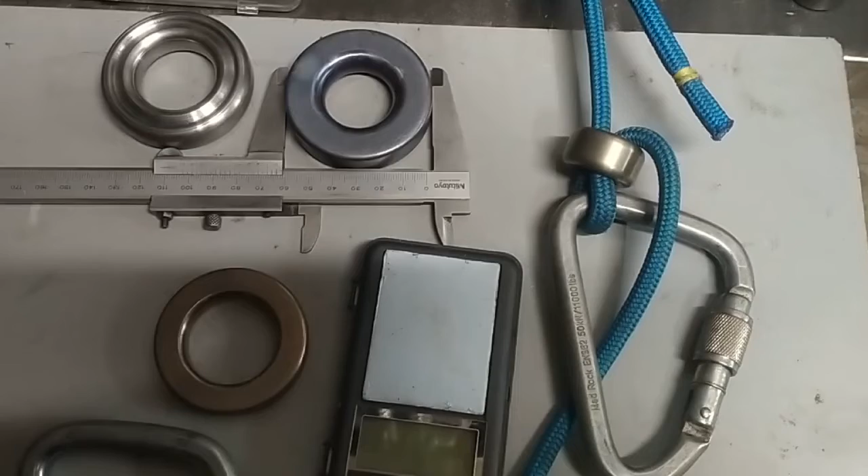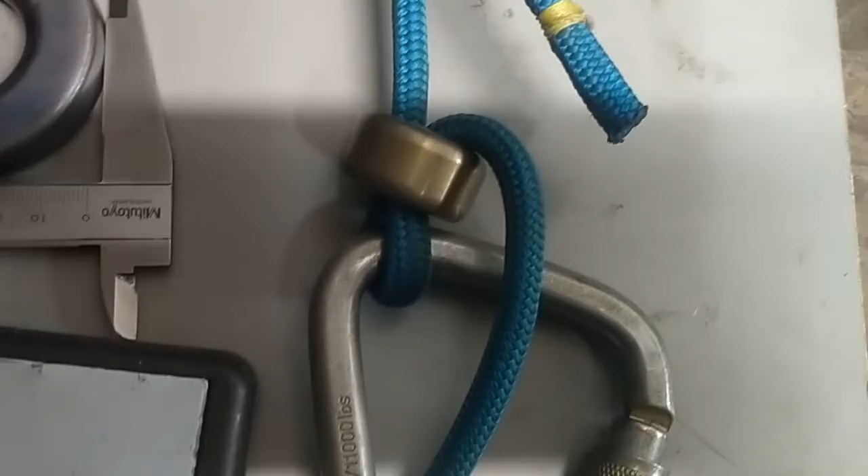My name's Adam. Today I'm going to test a few of these titanium rings. These are rappel rings. There's a belay device, 16mm hole for 8mm rope, designed to be rethreaded. I'm just going to weigh the setup here. So

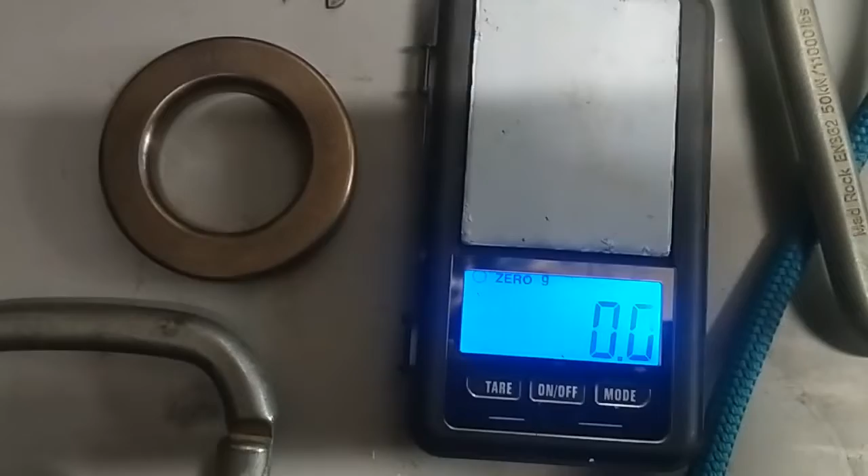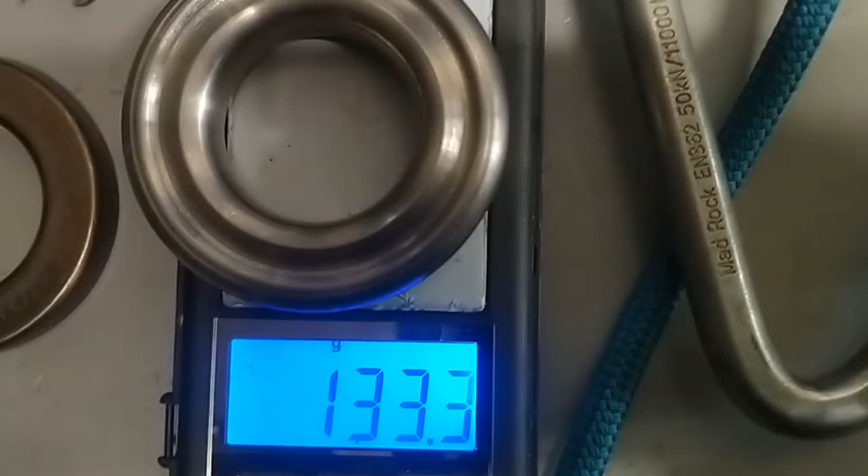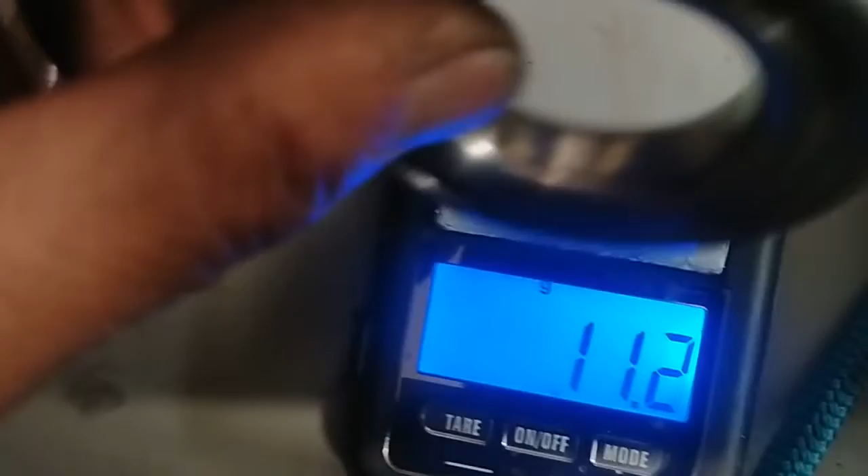normally you'd have two steel carabiners with opposing gates at the top of the top rope for top rope climbing. But the reason you have to oppose the gates is because there are gates. So the way I think about it, if you have a titanium ring, there's no gates and you can't gate load a circle. And I have the ability to make a much larger bend radius for the rope and make a bit of an I-beam cross section with this face groove here.

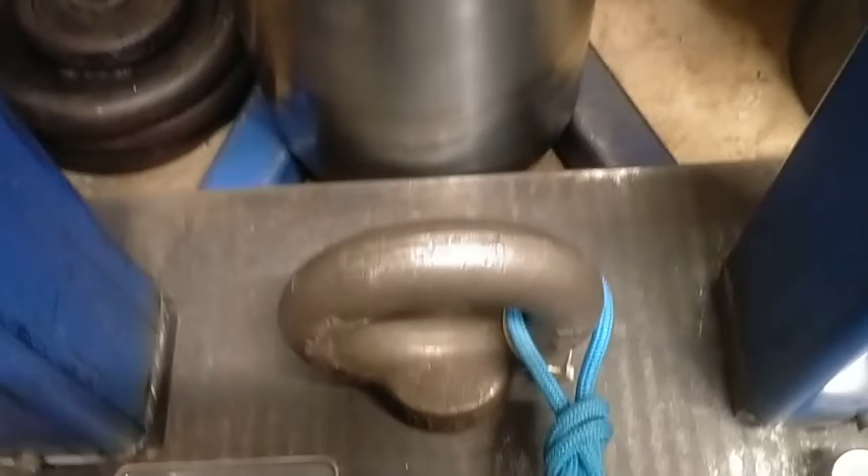As you can see, these titanium rings are a lot lighter than just one steel carabiner, let alone two. So I'll just finish weighing everything here. But before we get to testing, we have to calibrate our test rig. So you see here there's a steel cylinder, and in the next frame I'll get some measurements of that steel cylinder so you can check my calibration weight.

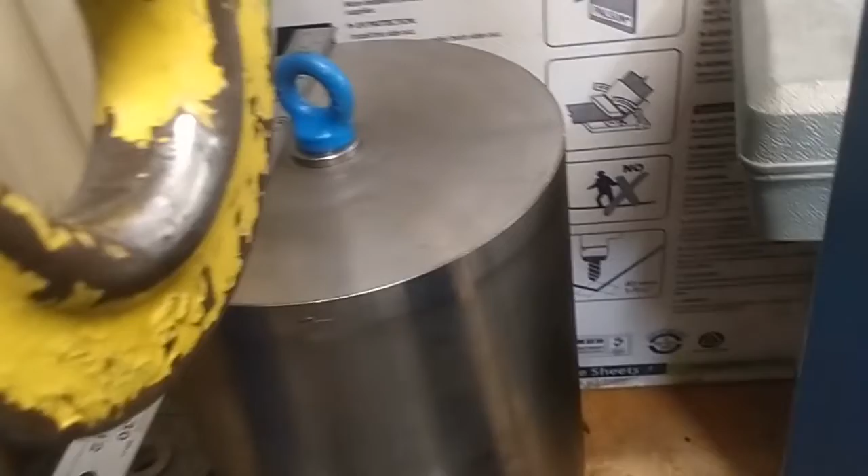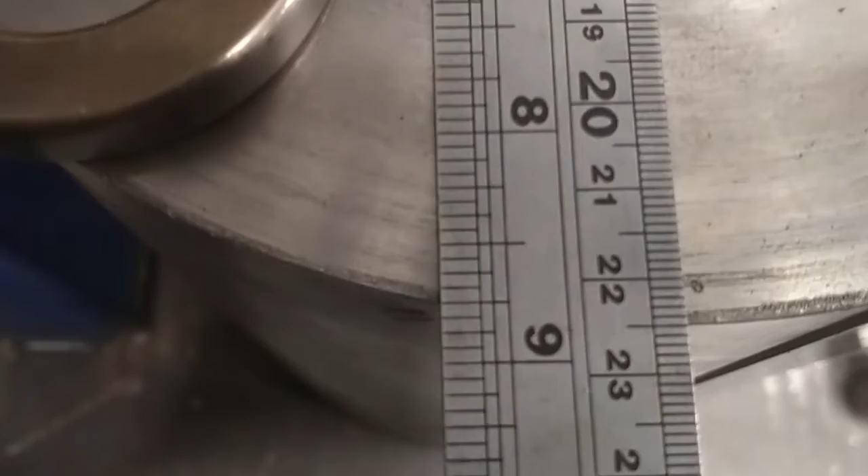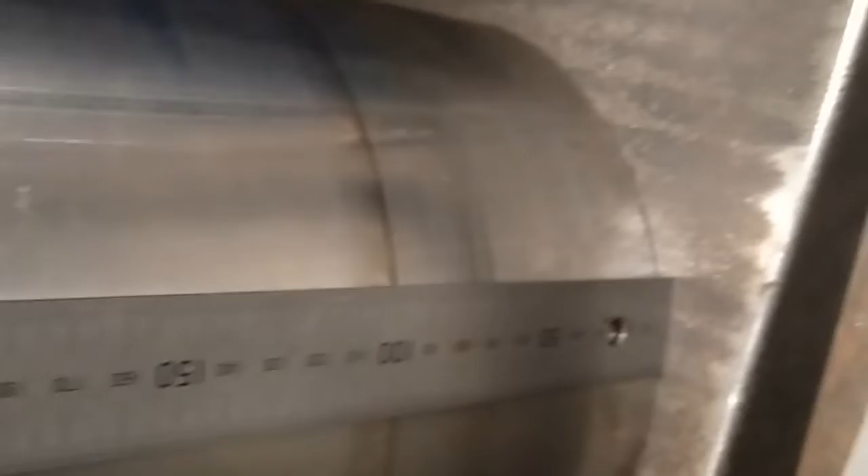Okay, so we've got a magnetic stop here that'll sit on the tangent. And we are at 225mm across, and here we are at 350mm high. Now I'll throw the calculations up in the next frame, and then we'll get to pull testing.

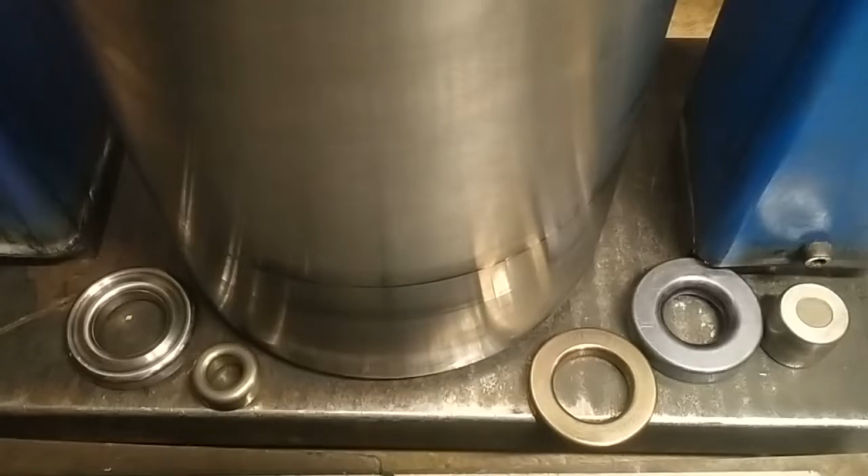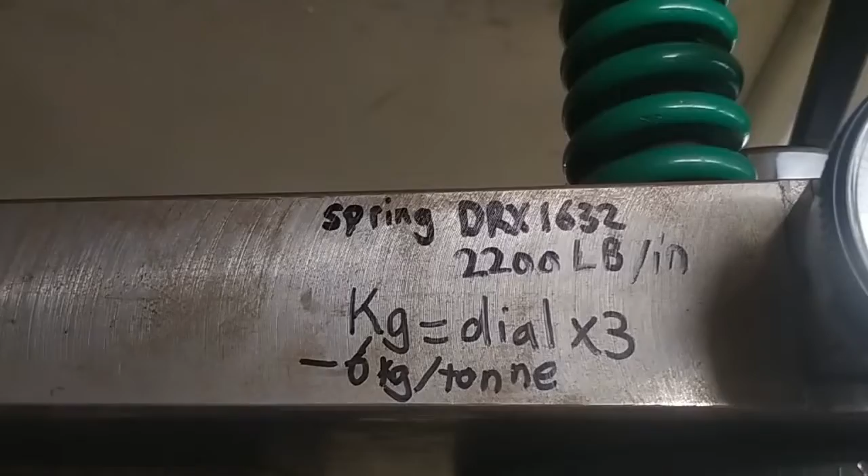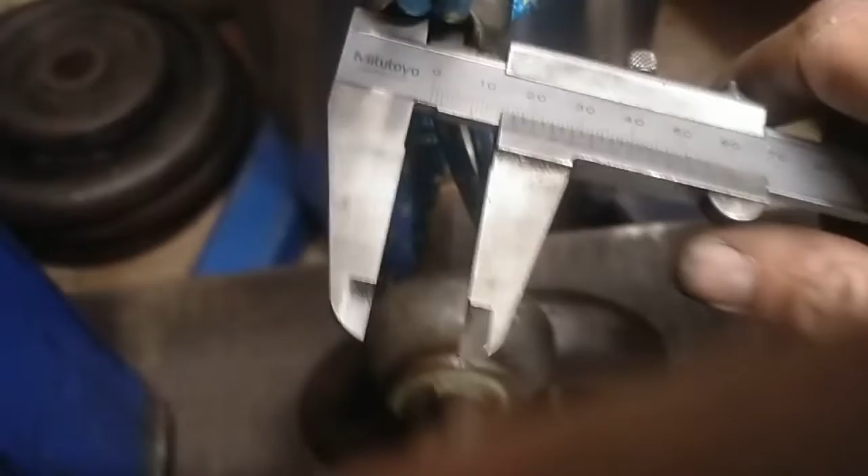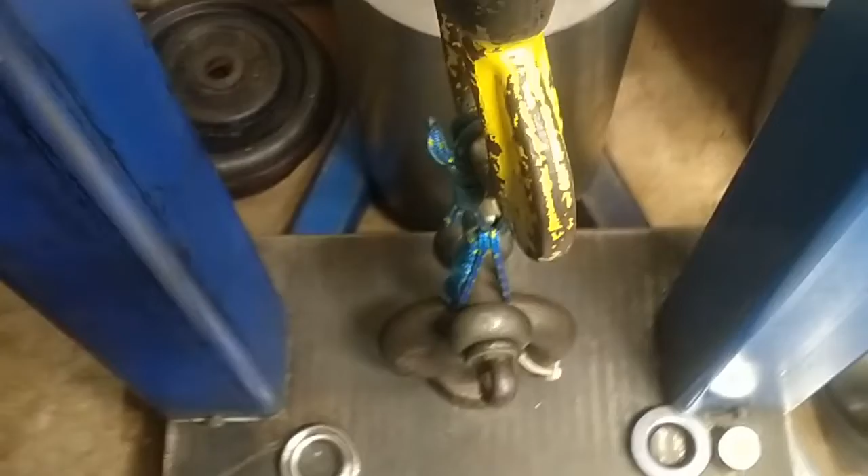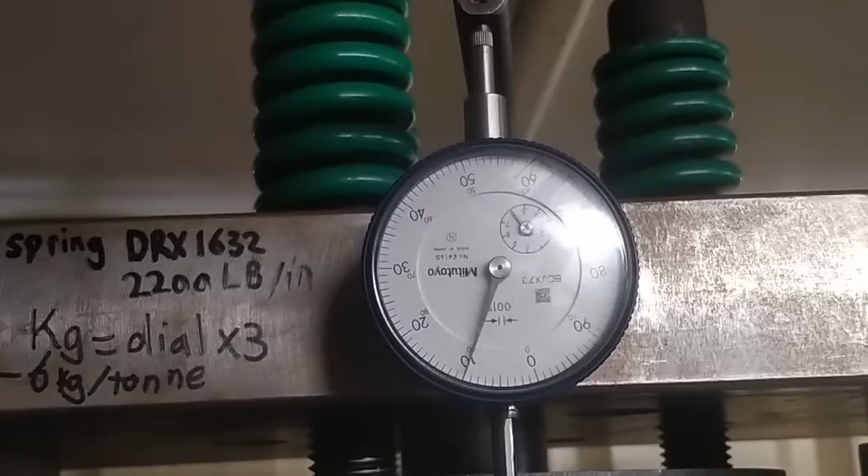So here we have our first victim. She's measuring 16mm, a bit over on the inside, by just under 17 thick, and just under 32 outside. I've got 2 6mm soft shackles. So that is 6, let's do up to 7. Just to pull with both hands here and film.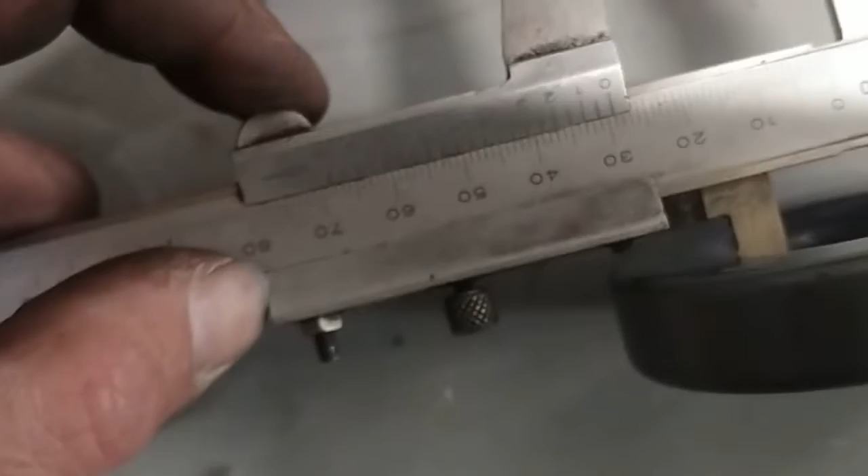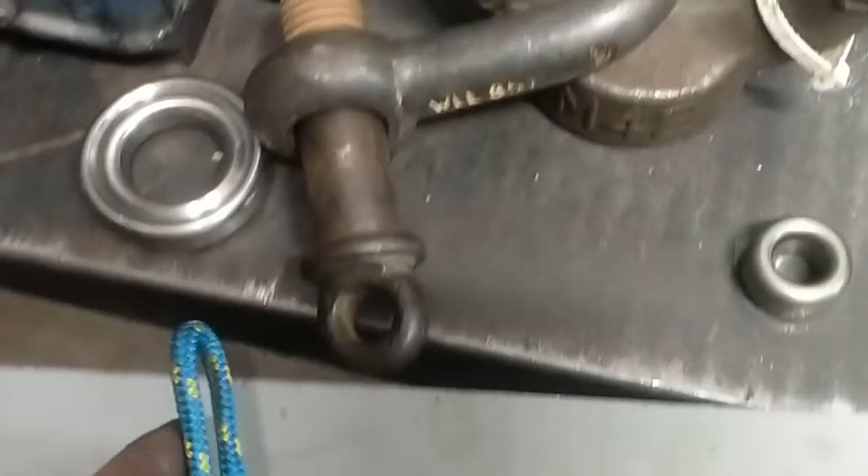So next up, we've got our second victim. 63.5, also known as 2.5 inch. Yeah, let's call that. Scratch that. 29mm. 15mm. So I'll have to have two hands to set this up. Okay, so we have our 63.5 ring in there between two soft shackles again.

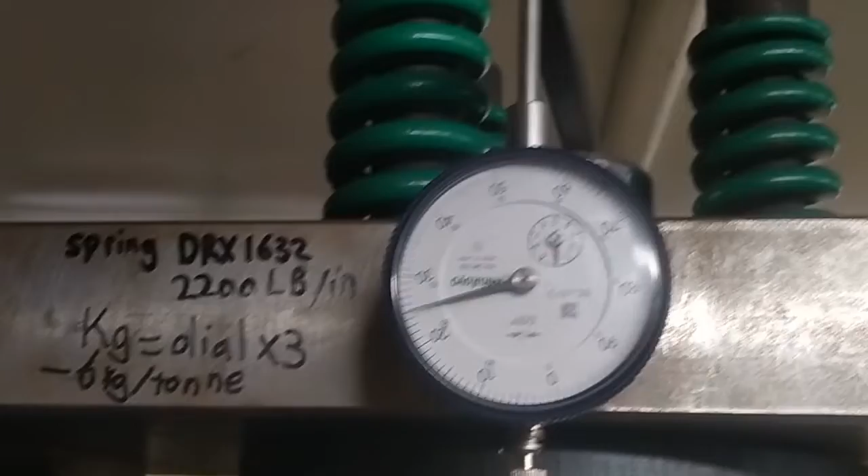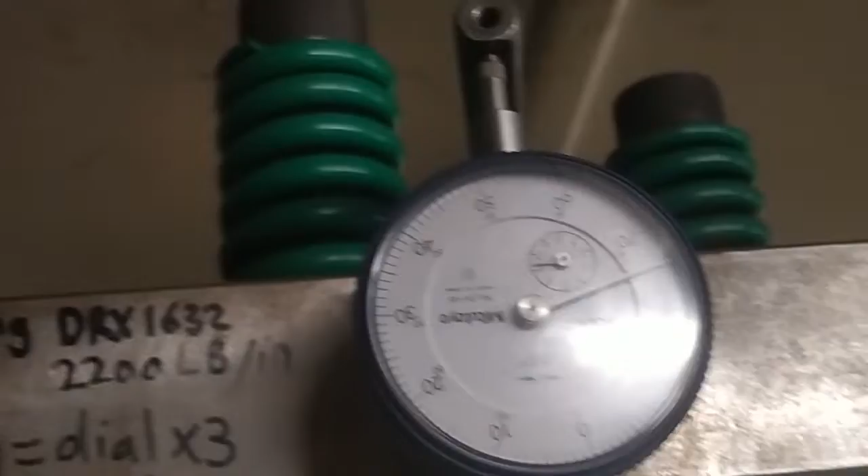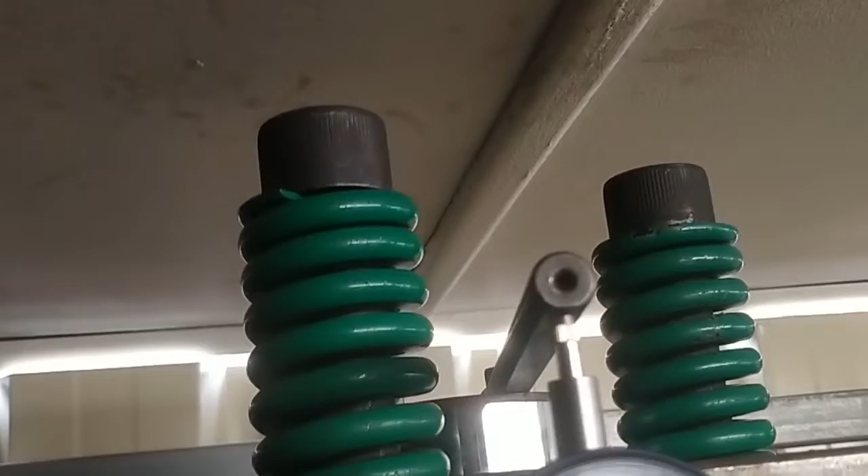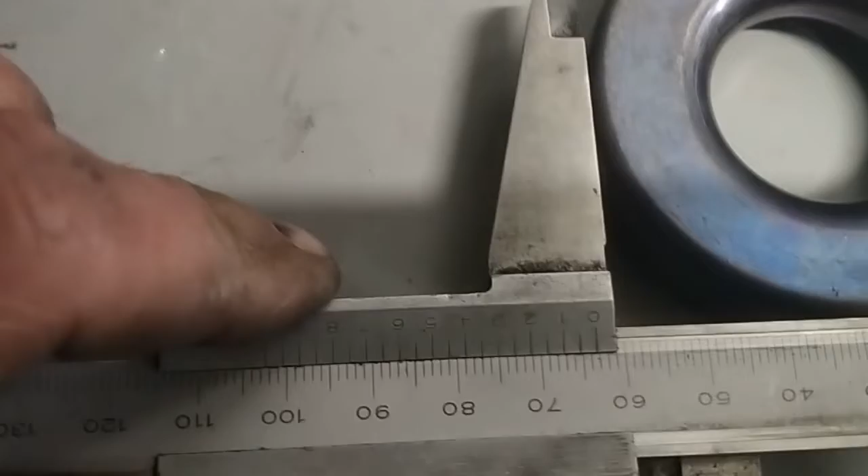Tonne. Okay, in safe excess of 2.4 tonne. Our springs are definitely compressed. Same deal here, we'll measure for permanent deformation. This is raw stock on the outside, so there may be a tiny bit of variation, but it's pretty good. I'm going to call that circular.

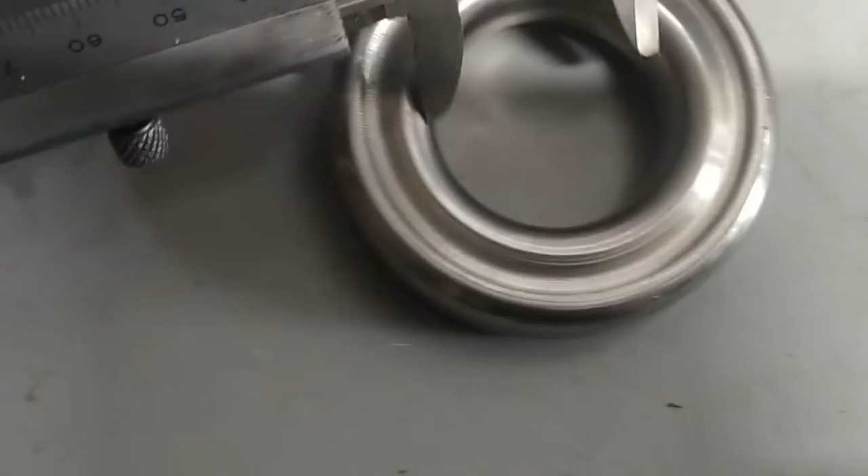So now we'll set up for our next victim, which is 32.5 on the inside. Let's go for outside next. It is 63.7. No, let's make that. Oversized ground material, fancy that. And 15, slightly shy of 15 as I recall. Yes. Okay. It'll take 2 hands to set up this one again, so I'll see you in the next frame. Same deal.

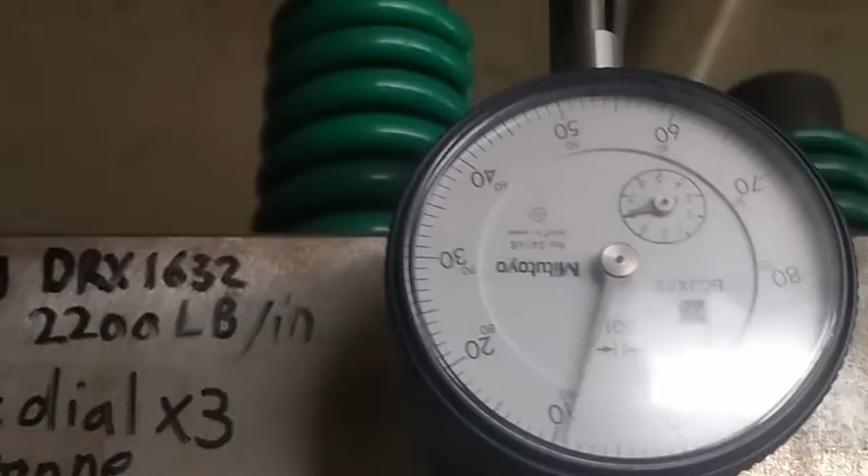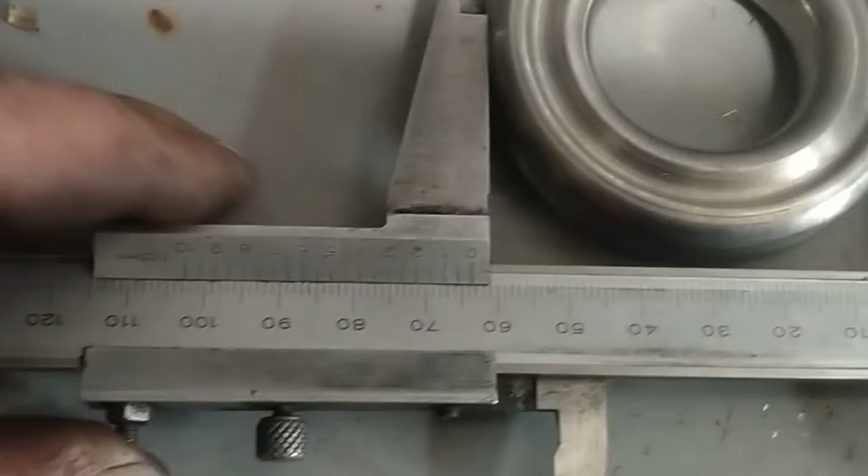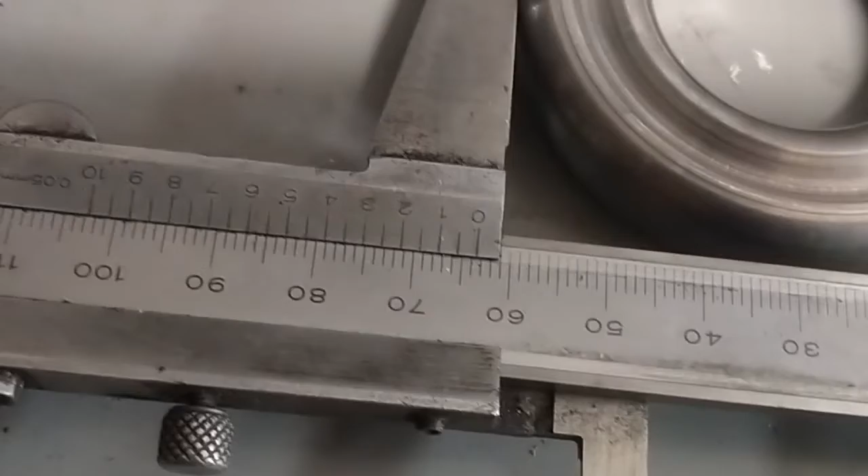Okay, safe excess of 2.4 tonne. I think we'll call that 5.5. Slightly over, it might be sitting off kilter on the vernier jaws. I think we'll call that still circular.

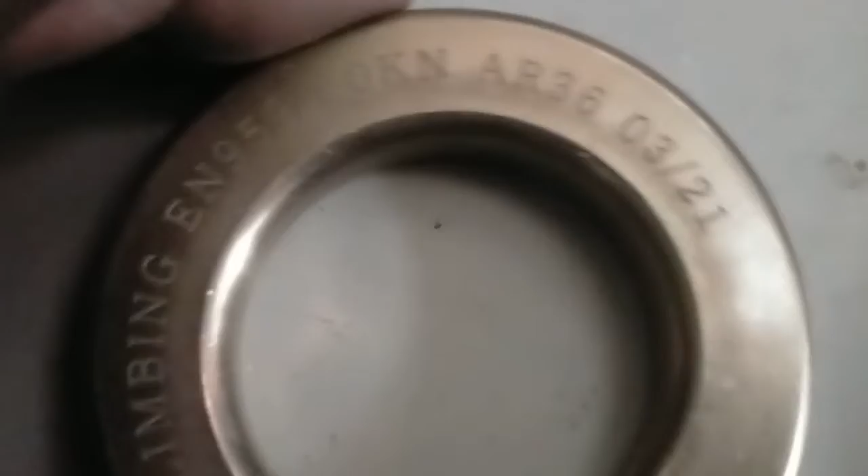Now, unfortunately with this one from Titan Climbing, the bend radius there is going to really mess with the jacket on this Dyneema soft shackle, so I don't really want to ruin yet another one. But this is 50 kN, and for what they are, they're quite good. They're certified, mine aren't, but you've just seen the test, so I guess you can stick your certificate somewhere where the sun don't shine.